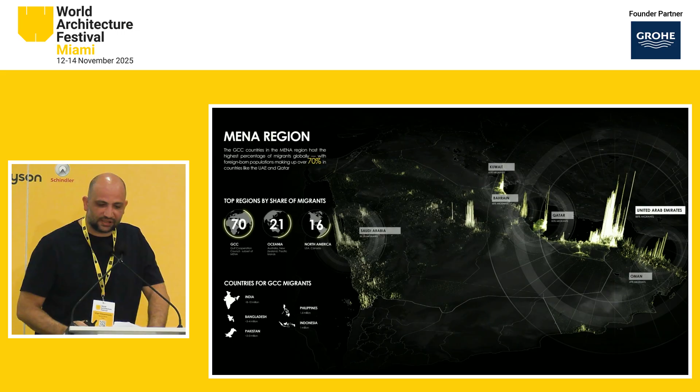We'll be surprised that 70% of some Gulf countries' population is shaped by migrants - they live there, out of the total percentage of people in the city. And this is not just one city, but I think the majority of Gulf cities. To the limit that in the UAE, 88% of the population is migrants. This is a very huge percentage of people who live there. But the issue is whether those people consider the city really their home or not. This is, I think, the question of the research we are doing.

Rem Koolhaas said in Al Manakh that the true Dubai is written in the labor language, not in Arabic, because those people don't speak Arabic - they came from different backgrounds and have their own language. But he meant here the metaphorical language, not the physical language.

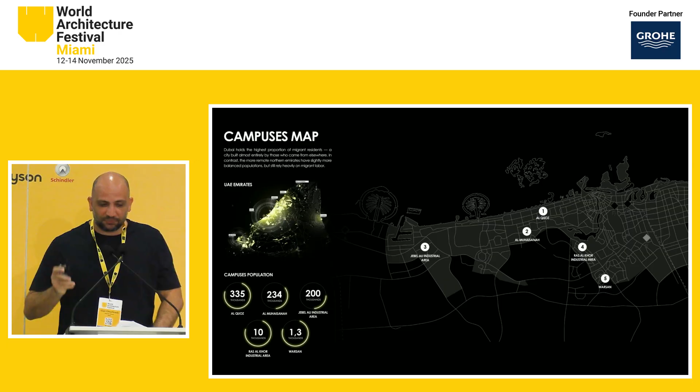So we mapped where those camps - the places where laborers are living - are, and also how they create this kind of invisible foundation. They came from different places with their traditions, with their culture, and in my opinion, they give depth to any city they live in.

And they work in many different jobs. The majority, almost 4 million, work as builders, 1.5 million work in services, and I think 1 million as Uber drivers and this kind of work.

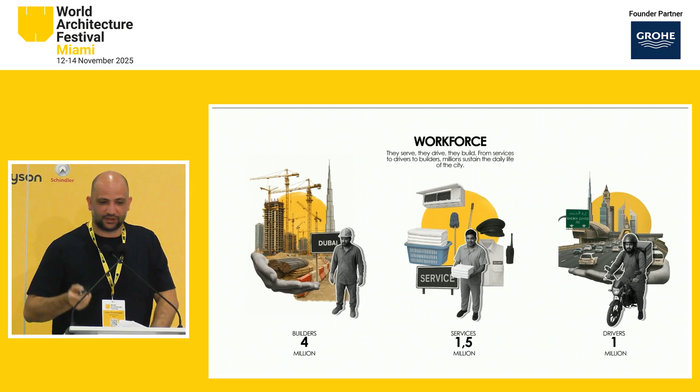Another shape of the city is that architects in the Middle East are all celebrated, like at WAF. They always work in comfort and recognition, but at the same time, the workers act in extreme hot and humid conditions. This is the dichotomy between the two lives of us as architects and the builders or workers on the site. However, I think it's really important to see those people.

I got this poem from a Lebanese filmmaker who is documenting the life of the laborers. It's very beautifully written here. He said, 'The moon cuts day shift to night shift, an important line when sleep has a price. Public space, workspace, park space, and bed space, Satwa's unique commerce.'

Satwa is one of the areas in Dubai. We all sleep very comfortably in our beds, I think, but those laborers have a very expensive price to sleep.

However, they still look at what they build with a sense of pride and dignity, because they feel they are already part of reshaping the city. And they have this festive culture and their own communities, like here, where you can have a haircut for 5 dirham. It's very, very cheap. However, inside the city you can pay 150 or something.

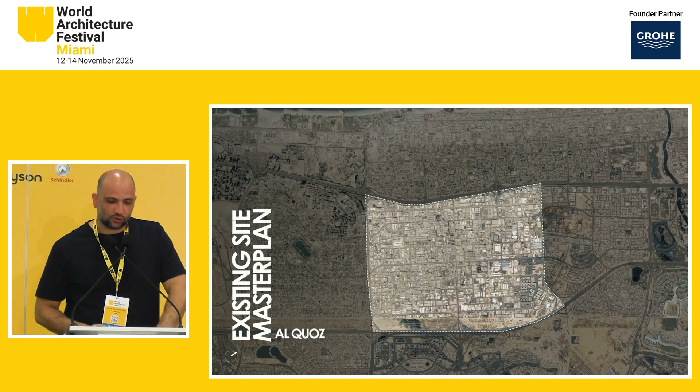So we mapped the experience. This is one of the areas in Dubai called Al Quoz. This is the camp situation, the built environment, the figure ground, and also the open spaces. This is the kind of prototype of the labor camps, either in a U shape or a very linear one. We started to understand the sizes, what kind of amenities, what kind of facilities already existed there.

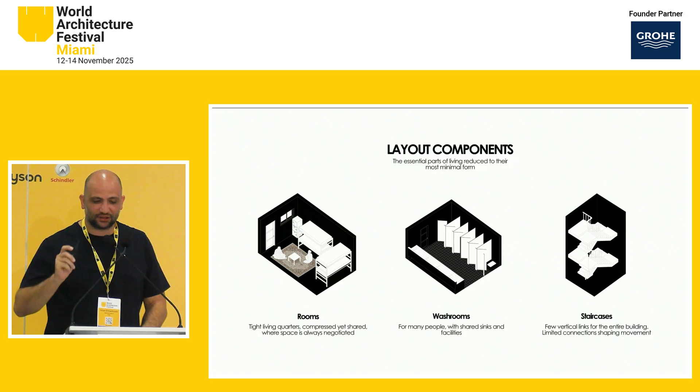This is the shape of life when the construction camps are built, and it works as a machine of collective living. It's just a machine, it has no soul. It's like putting people in a very glorified prison. But because they have this sense of dignity and hope, they started to plant their homes with whatever available materials they have.

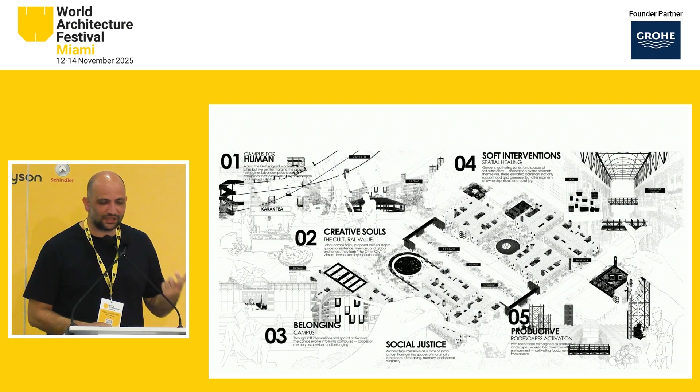So these are very true photos. I took them myself during my walk, just to document this journey, which I call the landscape of resilience. We mapped all of this experience to understand more about this phenomenology, because I think it's not only about one certain city, but a global issue. Because we came here wearing nice, talking nice, eating nice, but what about the real people who do the work physically in these extreme conditions?

So the idea of this proposal is really about how we can see those people as creative souls, not just as builders. We can transform the spaces they live in into more creative and belonging spaces. So it will go from margins, because they usually live on the periphery or margin of the city, to the map. Bring them back into the master scene of the city, from a machine to a space.

We started really to look at them, as I mentioned, as creative souls, and also from camps to creative campuses. This is just the difference between the two images. I think it's the act of architecture, how really we as architects and urbanists, through humble interventions or very simple acts, can change and transform human lives to be better and live more happily.

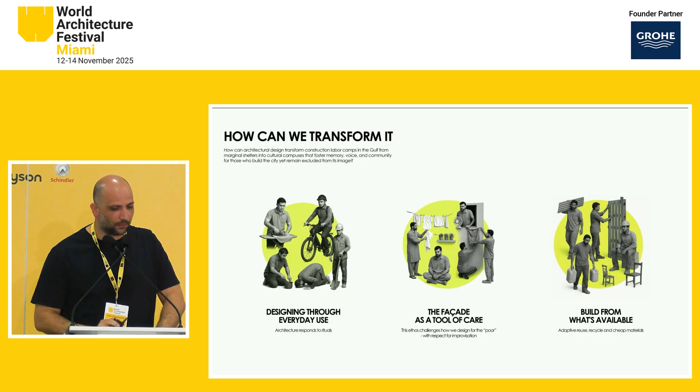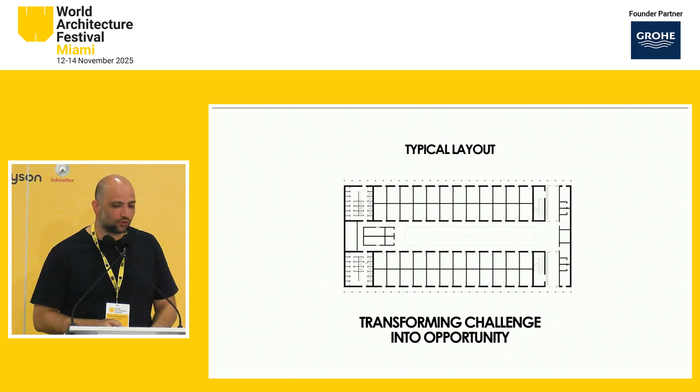I always believe that big moves can start with very simple steps. So we started to think about what kind of interventions we create. We took one of the easy and typical layouts to understand the challenges it has, and also to create a kind of opportunity.

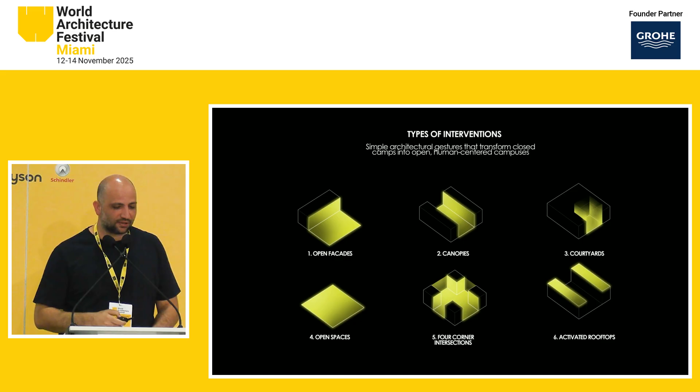It's about studying the facade, how we can have interventions inside the rooms, the courtyards in between, the open spaces, and thinking about what opportunities we create—which led us to this idea of a toolkit that could be gradually built by the laborers themselves.

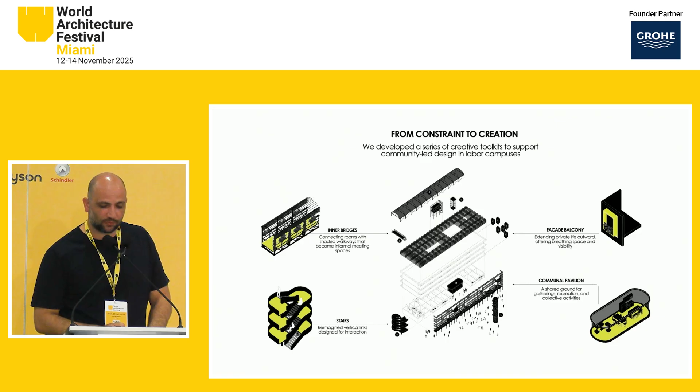So we can have this facade intervention—adding an extra skin of greenery and open spaces where people can meet and greet and have a social life together. We can have vertical elements, shading devices in the facade, and also utilize the roof spaces as a collective landscape.

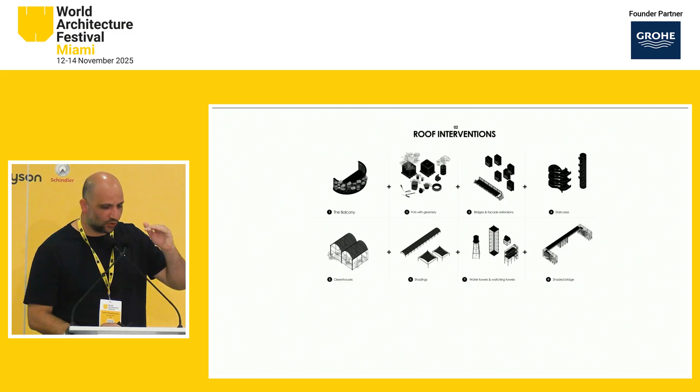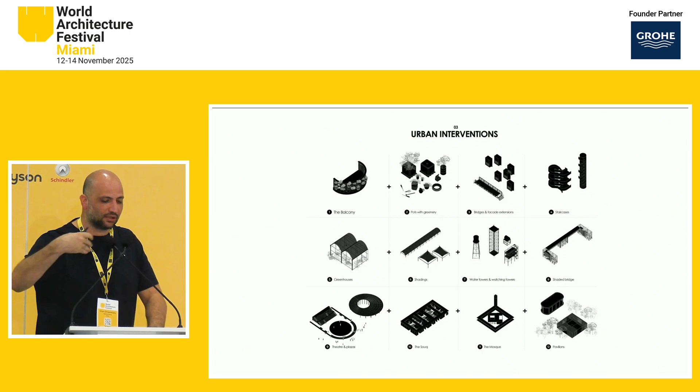Most of them are farmers, with a lot of knowledge of farming. So what if we use these roofscapes as a productive landscape? And what about the empty spots—can we use them for communal spaces like mosques, praying areas, and spaces to meet and have a social life?

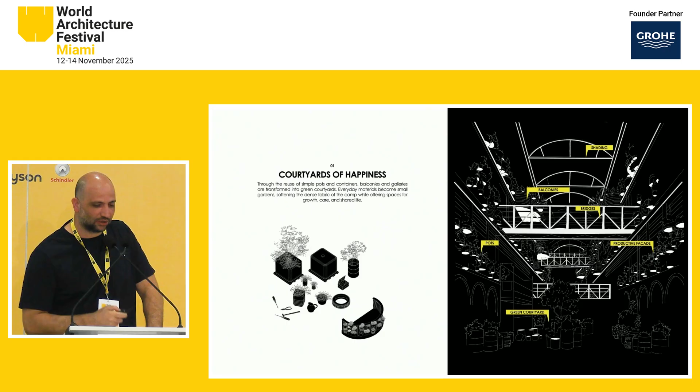These early sketches show how simple acts and simple moves can create life and space—turning a monotonous building into something really happy, which we call courtyards of happiness. The space is already there.

The material is already there too—a lot of leftover materials from construction sites. How can we utilize it in a very simple manner to create something out of it?

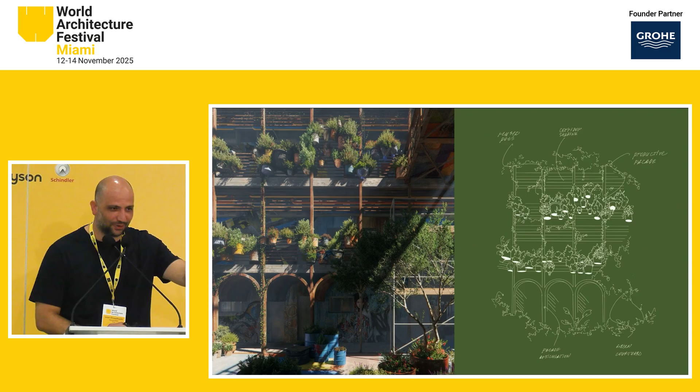And also how we can transform this gradually from inside out, because I think it's not about romanticizing the problems of other people. It's not just about having beautiful images to look at, but about the feelings behind those images.

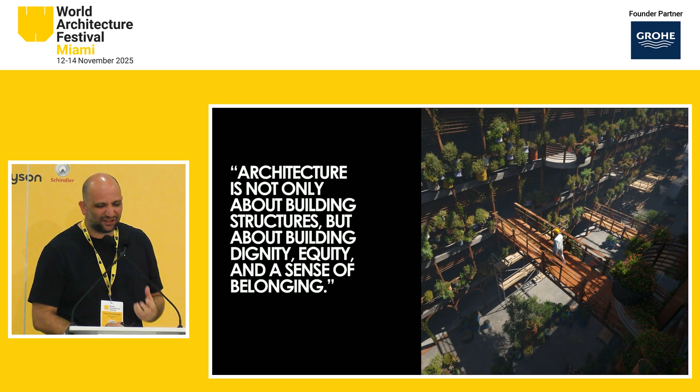This is the inner facade that we have. We can connect the buildings together with steel bridges, and also create this idea of space using the facade—instead of it being shameful because they've been pushed out of the city, with a facade that looks dull and monotonous.

How can we bring life into it, so it becomes a very pleasant space, to the point that it brings people closer to each other?

By simple acts of architecture, they build marvels, they build cities, and I think they can build very simple things for themselves if we have the desire and pay attention to this.

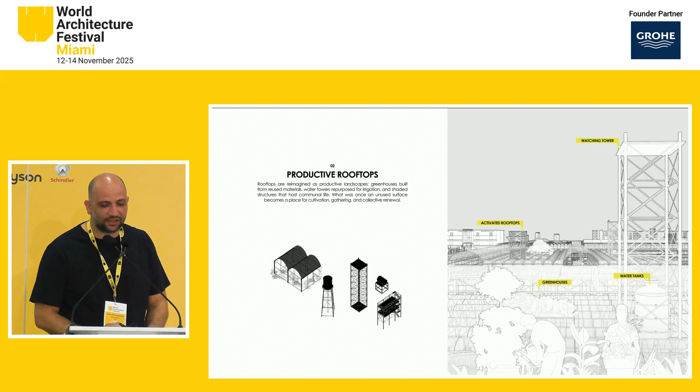As I mentioned, the rooftop is another opportunity for productive landscape. They can feel they have their own gardens, occupy the sky, experience the city from above, and convert these neglected rooftop spaces into spaces of production and community living.

It's really important to give this sense of feeling that they already have their own gardens rather than just living on concrete buildings. This is an image of how it could be.

We're always trying not to make the architecture very fancy, keeping it informal—using open spaces like pockets as urban interventions, which could be a marketplace, a Friday market, things they can sell, bringing another layer of economy to them beyond their working hours.

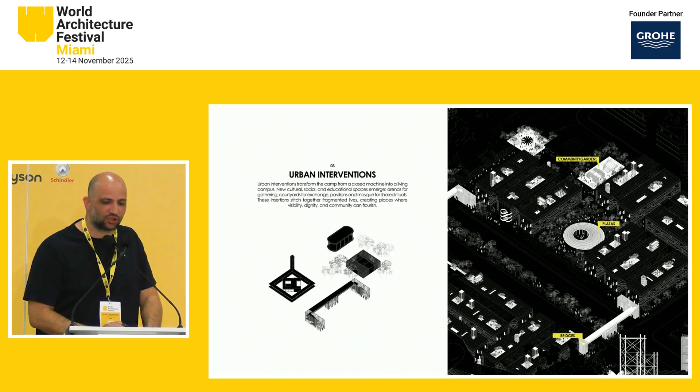They feel it's not only about doing construction, but also using their talent in a more effective way. By visualizing this, I think we can have a larger community that gives a sense of belonging and happiness to the people who really deserve it.

I really believe architecture is not just about building good buildings, but also about inclusion—about making everyone in the city belong to the city.

The main question we have to ask ourselves as architects is: when architects listen, even the most silent spaces in our cities can speak. We can't erase the distance anyway, since the buildings already exist, but I think through simple acts we can bring people a little closer to each other.